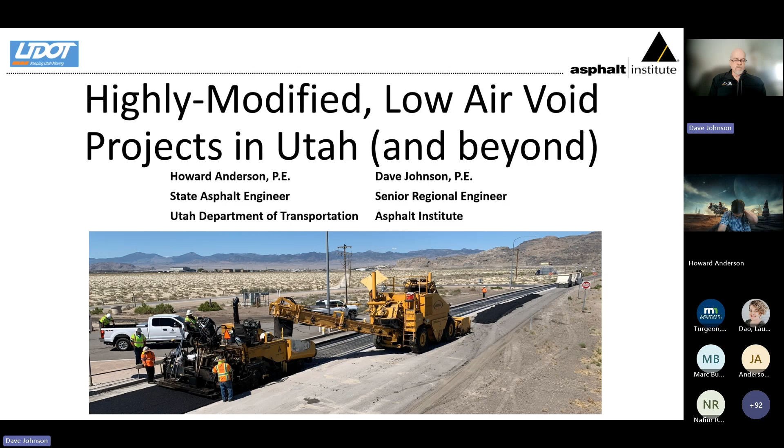So let's go ahead and get started. So what we're going to talk about is what has happened in the past as well as elsewhere around the country, a little bit of detail as it relates to thick lift paving as well as highly modified materials. We're going to offer some insight on the first pilot project that was done at the port of entry near Wendover, Utah, just off Interstate 80 along the Nevada-Utah border.

So I want to begin by acknowledging that this effort was really facilitated by an incredible partnership between the Utah Department of Transportation and the contracting community and the Utah Asphalt Pavement Association. Reed Ryan, who was the executive director for 12 years in Utah with their association, deserves a lot of credit as well, because of this partnership between the agency and the contracting community. The move to this material that some would have truly felt impossible has been quite seamless, and as we will see, the tonnage in the state of Utah is quite frankly exploding.

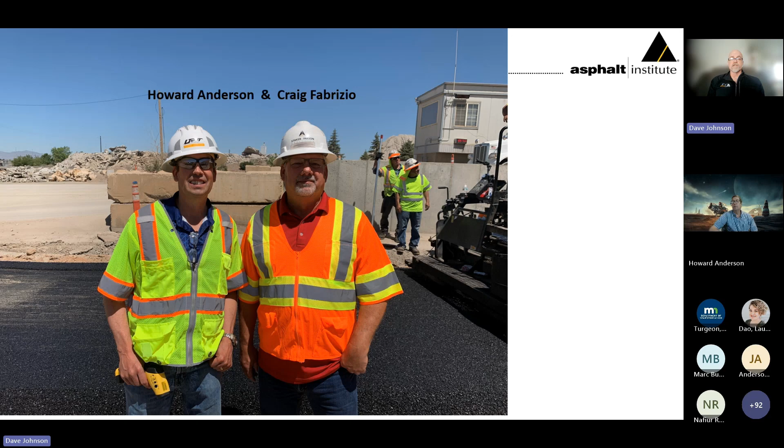So looking at some of the past experience with either highly modified or thick lifts, the state of South Carolina deserves special mention. They have been doing thicker lifts, especially along their eastern seaboard in areas where they're looking for rapid turnaround of a pavement. It may or may not be modified. It depends on the particular project, but they have had some pretty thick single lifts, almost to 8 inches, as we can see, 7.9 inches compacted. And they've consistently had very nice densities above 95%.

There's very few things that happen in the asphalt world that the National Center for Asphalt Technology at Auburn University does not get involved with. And they've had a lot of experience with thick lift paving to where that now is their go-to methodology when they're looking for a rapid rebuild of some of the sections. And that all began with some work that was sponsored by South Carolina and Kraton Polymers.

Kraton, of course, was looking at some highly modified materials. South Carolina had a combination of the two. The Kraton material in particular was laid in multiple lifts to a total of 5.75 inches, so 5 3/4 inches. It was a 12.5 millimeter mix. They also got fantastic densities.

And in fact, while it's not listed here, we say great performance. It was truly acting in a perpetual fashion. Unfortunately, that section was not re-sponsored by Kraton, and so it was removed after one cycle, 20 million ESALs. But very encouraging that we could have perpetual performance from a pavement, say that 3 times real fast, that was surprisingly thin, so less than 6 inches in thickness.

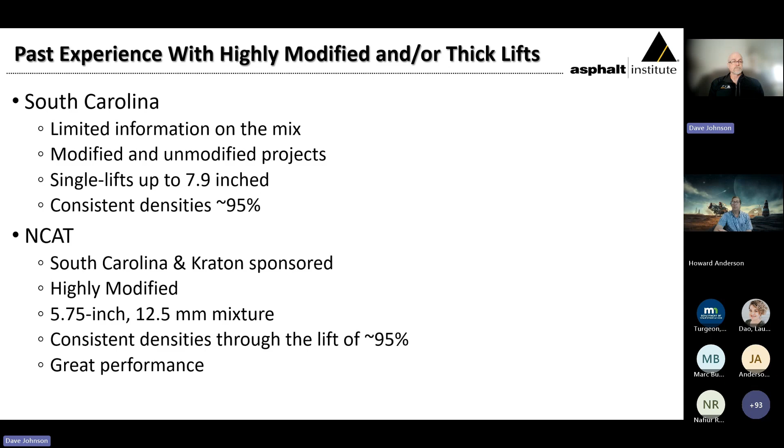Utah began work on this back in about 2015. They were doing a lot of work with the Hamburg device. Utah was one of the pioneering states of the introduction of that wheel tracking machine into the United States, and so they did a lot of Hamburg work. We've got some test results that we'll show you in just a moment.

These were a typical 12.5 millimeter super pave mix. They had binder samples from various asphalt contents all the way up to nearly 7%. They were running 40,000 passes, which is double the pass count, even for a higher pass count typically with the Hamburg. And as we'll see, they were making some modifications to the equipment for the second 20,000 passes.

They did a simple substitution on a couple of projects that were constructed in 2017. The simple substitution was taking a super pave mix design that had been designed with a 64-34 binder, and they simply dropped in a 76-34 binder and laid it at typical lift thicknesses of around 2 inches. The performance has been very acceptable, but Howard recognized that we could get more out of this mix if we were willing to look outside of our normal box of volumetrics.

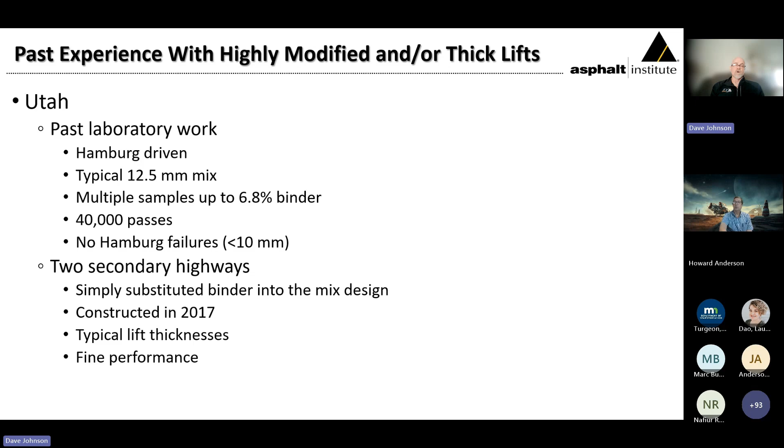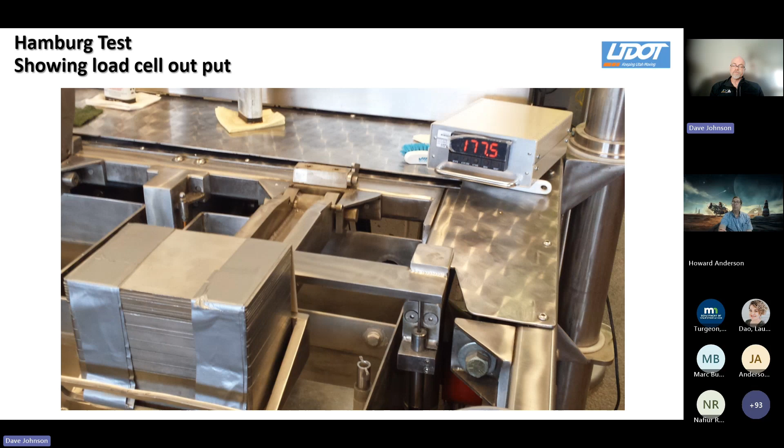I said that they made some changes to the Hamburg. You'll notice the duct tape extra weight. So they ran the Hamburg at its standard process for 20,000 cycles, and then they increased the weight for the second 20,000 cycles. You can see the results with, in blue, the original 20,000 passes, and then in orange, the additional 20,000 with the extra 20 pounds. 158 pounds is your normal loading, and the second set was with 178 pounds.

The other thing we want to point out is the air voids. So multiple asphalt contents are shown here at 1% increments starting at 4.8% up to the 6.8 peak. Notice that the air voids underneath the wheel went from a little above 7% at that lower asphalt content all the way down to the lowest value on the far right, about 2% underneath the wheel on the 6.8 low air void count.

The other thing to notice is 10 millimeters is the rut criteria for Utah on their typical Hamburg at 20,000 passes. Even after 40,000 passes, the worst performer was still meeting that requirement at just under 9 millimeters of rut.

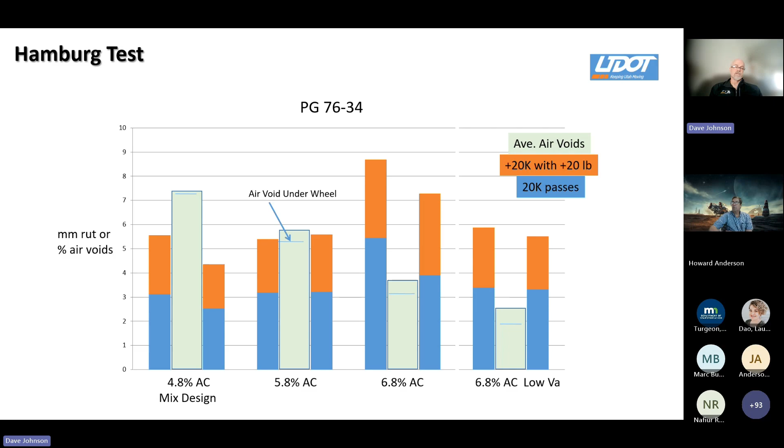Here's what those slabs looked like visually, so you can see. These were cut from directly under the wheel, and so there's not a lot of distortion that we see there.

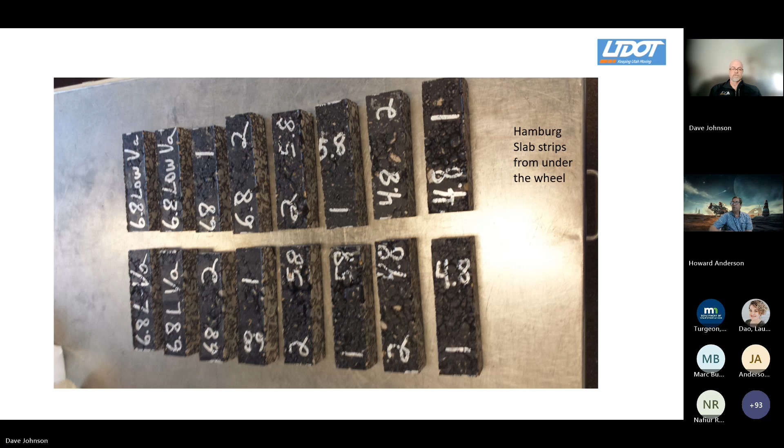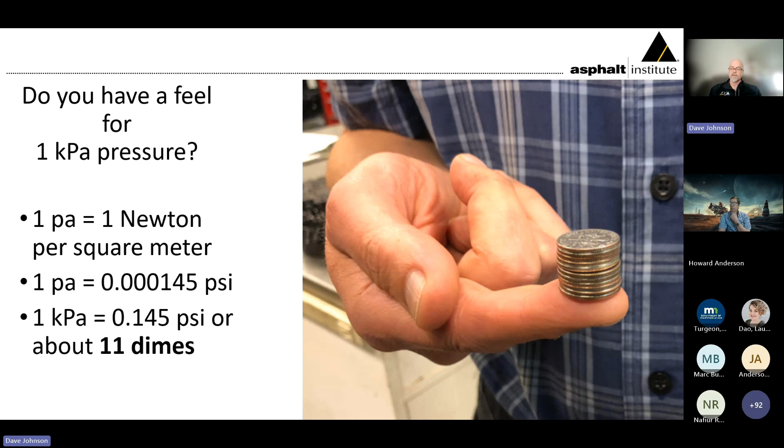To help put this in perspective, Howard and his crew have produced a couple of different videos. We're going to begin with one showing what happens in relationship to rutting. Howard does a great job of thinking outside the box, looking at common everyday experiences and how they might relate to a situation that we as pavement engineers converse in. He wanted to look at what 1 kilopascal of pressure would relate to in real world terms. In his spare time he did some math and found that it would be about the equivalent of 11 stacked dimes. So with those 11 stacked dimes, he placed them on top of a couple of different samples, and we have a video that they produced to demonstrate this.

So I'm going to let the video play and quit talking for a second.

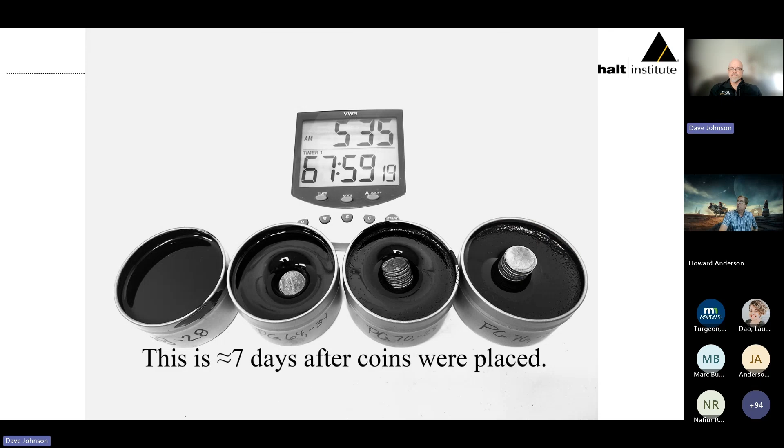Thought I had another picture. So there's 7 days, there's 14 days. And we have another video. They just recently, and quite frankly, I just added this video this morning.

They did some more lab goofiness. When you have an asphalt lab, you come up with some really neat ideas. I remember when I was at Montana State University in charge of our asphalt lab, we would play around with different things, and Howard and his crew have done so as well. They wanted to look at these materials, the same 4 binders as we just saw, under the elastic recovery device. Then they took it one step further, putting it at low temperature, just slightly below 0 on the Fahrenheit scale.

And then they dropped their specimens from a 3-foot level. I'd add, Dave, that these beams that are dropped have been through the rolling thin film oven and the PAV, just like a normal BBR beam. You'll also be able to see how they pour out, which is really a requirement for this to work, that they all are able to pour and mix at the higher temperature. But go ahead and play it.

So we have it playing, and we just poured the specimens, and here we are stretching it on the elastic recovery device. So the dog bones are getting pulled out, and then they were trimmed.

Offering some of the commentary because I don't think Howard can see the video again. I'm able to see it now. I had to press play.

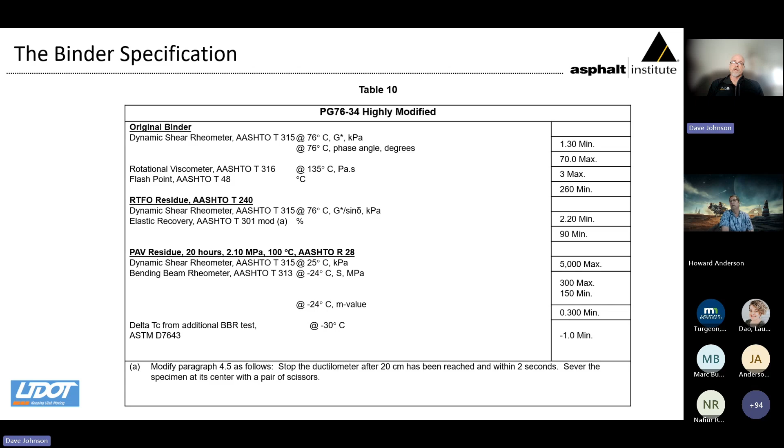One of the initial projects with the drop-in back in 2017 did experience some difficulties in the field of moving that material through the plant. So some changes were made and things have been working out quite well.

This moves us to the initial pilot project that occurred near Wendover, right along the Nevada border. This location is most famous worldwide for the Bonneville Salt Flats, where world record land speeds are attempted and commonly broken. It is an extremely high truck traffic area with between 2 and 2.5 million ESALs per year, with about 51% of the traffic stream being heavy commercial vehicles. It does get quite hot in the summer.

Just for your information, if we were to use the standard LTPP Bind software at 98% reliability, the binder that would be specified would be a 64-28. But we're using a 76-28, so we've got 2 bumps on the upper end and 1 bump on the lower end to get to that, the 76-34.

Did I say something different? You said 76-28. Thank you for that correction.

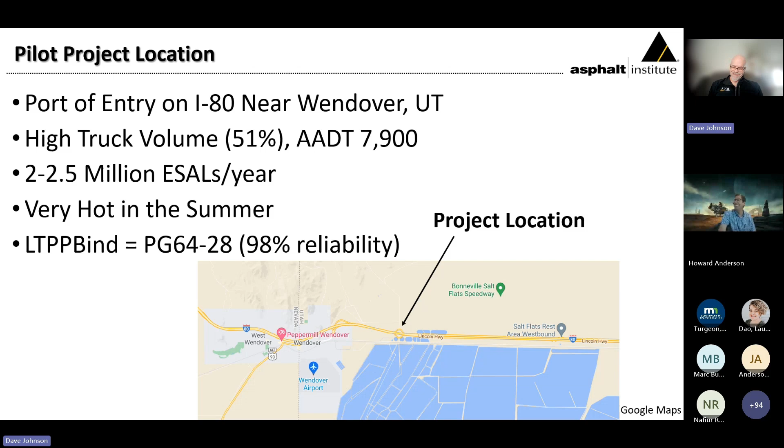The project itself was a 6-inch single lift. They milled and inlaid some existing Portland cement concrete, around 330 tons, highly modified binder of course. It was a dense graded 12.5 millimeter Superpave mix, and we'll show you that mix design here in a moment. It was constructed in a single lift, and it's also noteworthy that this is a 2-hour one-way haul.

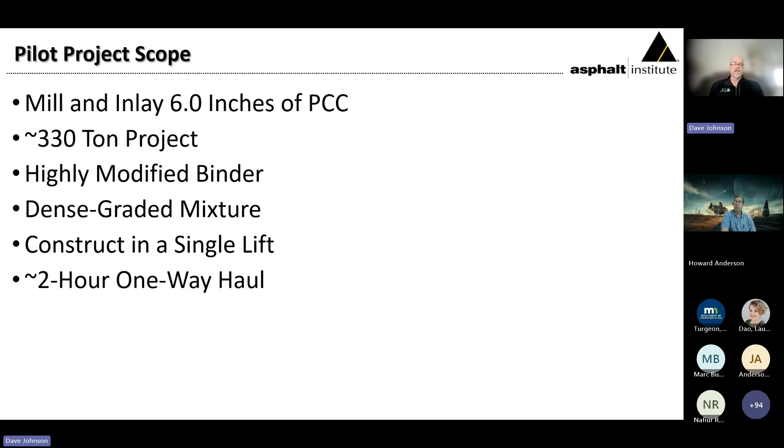So they were producing this material just north of Salt Lake City. The contractor was Staker Parsons, part of the CRH group, and they hauled it over to the Nevada border along Interstate 80, which takes them roughly 2 hours.

You can see the mix design requirements calling for that 76-34 binder. Normally, this would have been a 75 gyration mix design, but as we see, they dropped that down to 50. As mentioned, it is a 12.5 millimeter nominal maximum aggregate size. This is a hard rock quarry, 100% crushed material. The binder minimum requirement is 6%, which is exactly where this mix was designed to.

The air void range now is 0.75 to 1.25% air voids. 1% was what this was designed at. And just FYI, if it was taken out to 75 gyrations, it would essentially be a 0 air void mix.

The allowable range for VMA, as we can see, is 15 to 17. They were towards the lower end of that at 15.3. With those other volumetric changes, that requires a change in the VFA. The range, as we see there, is 90 to 95. This one came towards the middle of that at 93.3.

They did a drain down test with that higher asphalt content. They want to make sure that there wasn't going to be issues. Normally, you wouldn't do this in a Superpave mix, of course. We would use that for SMAs or an open graded friction course and that type of technology. But as we see, drain down wasn't an issue.

And then you can see the Hamburg results for this mix after 20,000 passes. And there was an adjustment made. We talked about in the initial work how they had added weight to the Hamburg. Now, instead of adding weight, they changed the temperature, bumping it up 4 degrees centigrade.

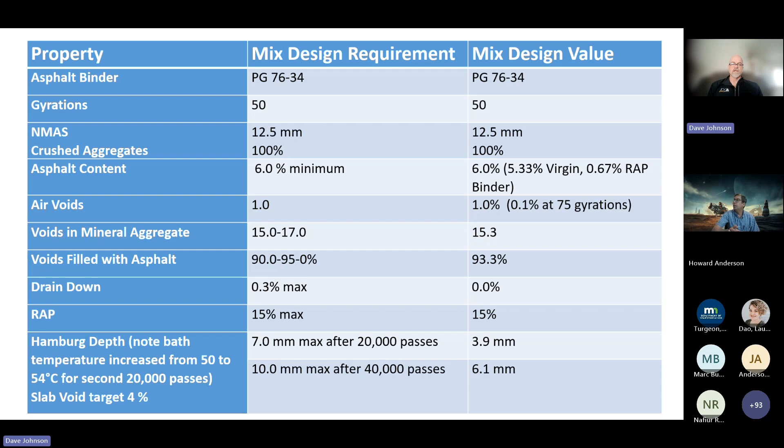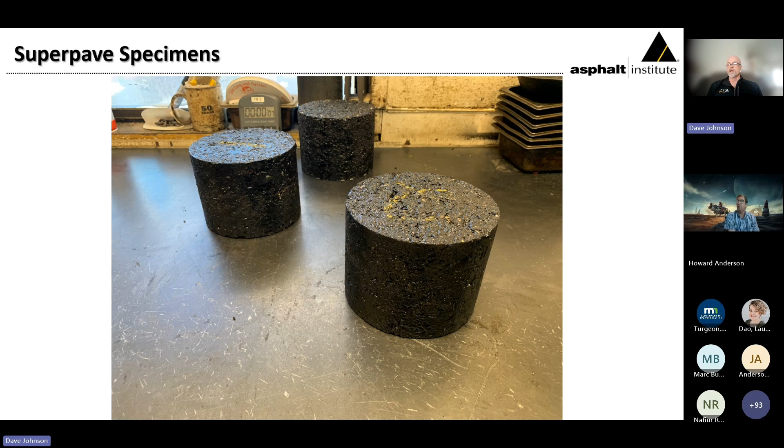Just FYI, these are what the specimens look like. This is a 6%, this is that initial project. Yeah, they appear a little bit rich, but there's nothing really terribly extraordinary about the pills.

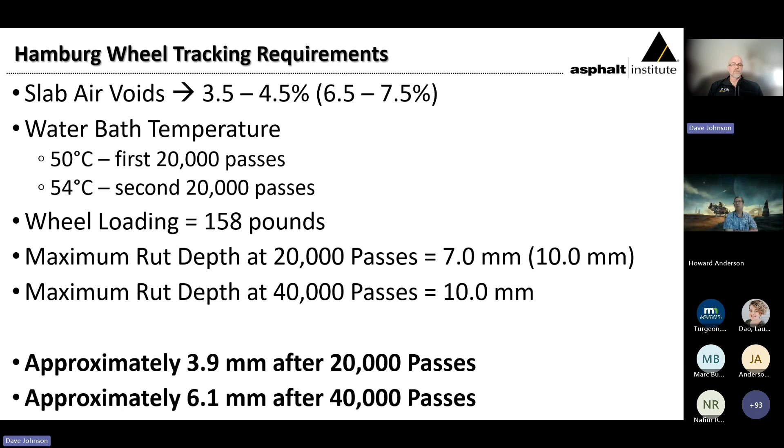A little bit more detail on the Hamburg. We already saw a number of these, and I mentioned how we made an adjustment to the air void content. There was that shift in the water bath temperature, the standard wheel loading at 158 pounds, and again a total of just over 6 millimeters after the full 40,000 passes.

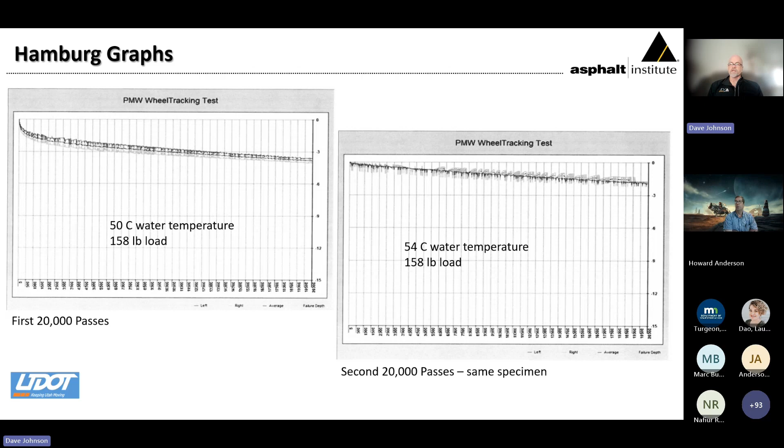Staker Parsons, as was mentioned, is the contractor for this initial project. They were producing this mix just north of Salt Lake City at their Beck Street facility, and they wanted to verify that they could actually work with this material and get the proper density. So they made the decision to produce mix and lay it. They were not compensated financially from the Utah Department of Transportation for this part.

Notable differences - as we mentioned, we're going to be paving essentially in a bathtub out at Wendover, surrounding the mix by Portland cement concrete in that milled area. Here, it's truly an unprepared aggregate base. That's their scale that we see in the background. A lot of trucks through the years have gone through there, so it is very, very well compacted, but their preparation was simply to run a blade across it, then broom it, then pave it.

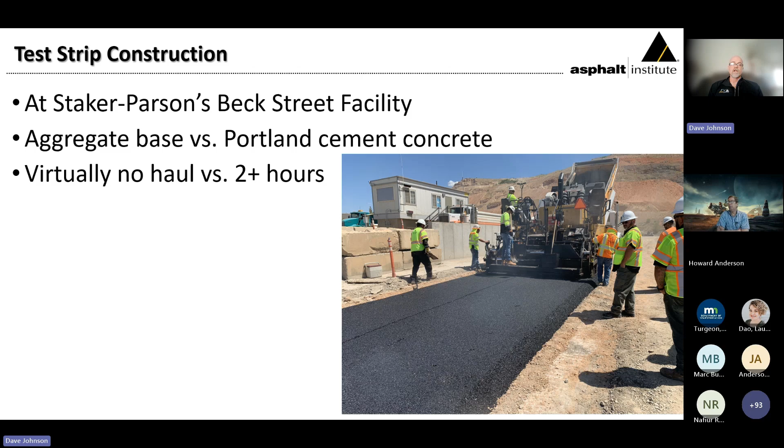There is no haul on this, so instead of that 2-hour haul, it's virtually a 0-minute haul. The test strip construction went without much of a hitch. Compaction was done with a single double drum vibratory roller, as we see in this picture.

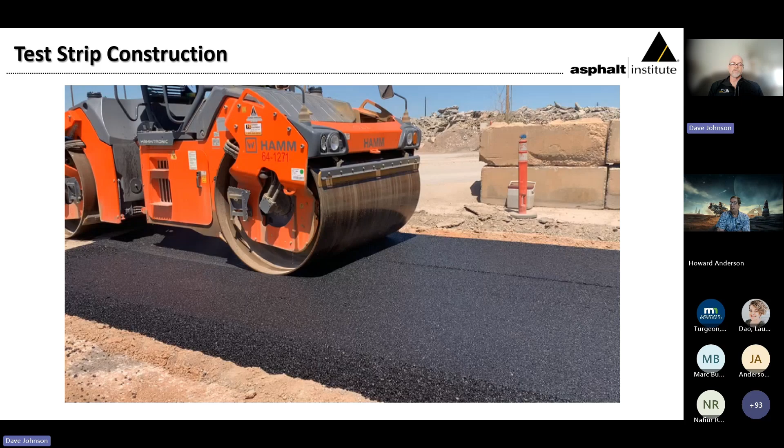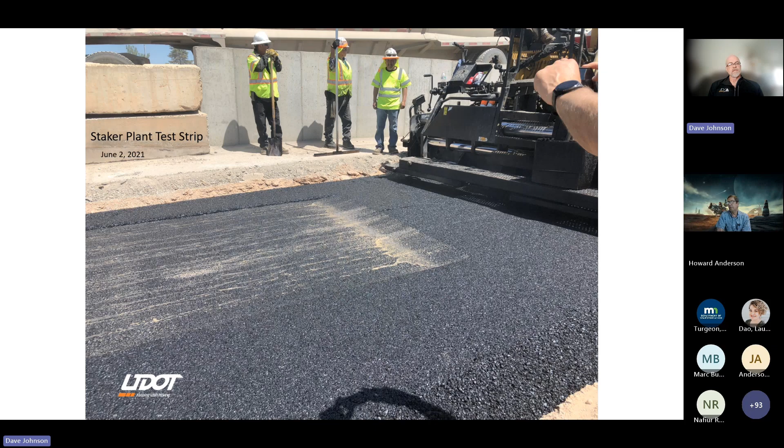Just an example of what it might have looked like after an initial pass. I have to say that my one regret is I don't have any pictures of the roller hanging off the edge of this mix. We all expected it to walk out a little bit. It was shockingly stable - not too much of a surprise when you're trying to pave at this thickness.

The volume of material that's running through a paver is pretty exceptional, and the contractor did have to make some adjustments to their process to make sure that they adequately fed the paver. Of the various things that they looked at in this test strip, this is one of the more valuable pieces of information.

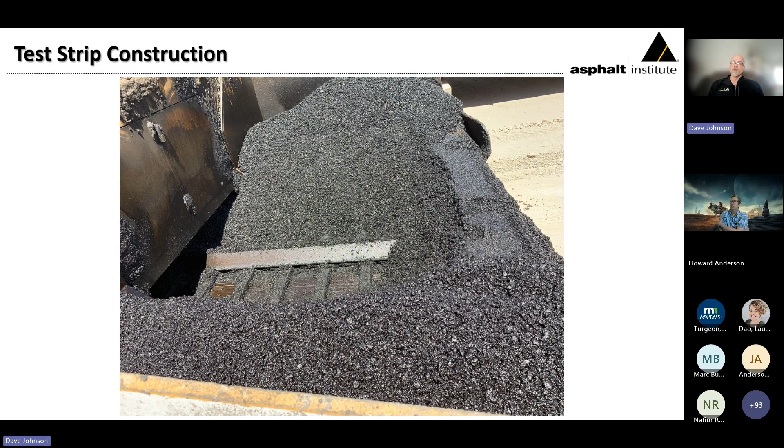Temperature is 275 at the surface and just at about 300 internally, so not exceptionally warm. What did we learn on the test strip?

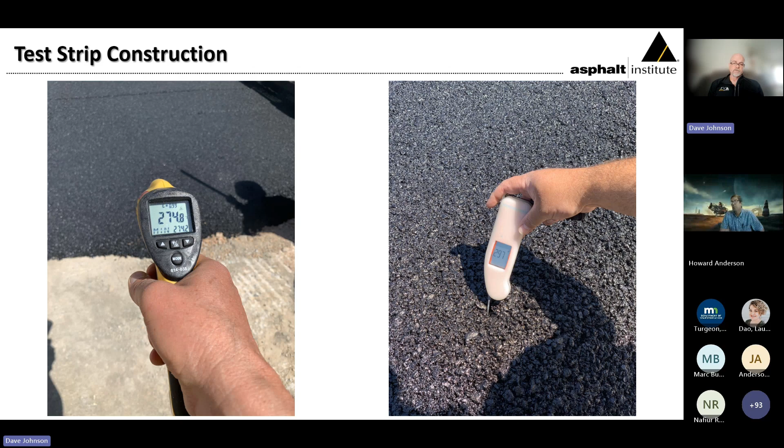Achieving densities of over 97% was rather easily done. Regular rolling equipment and procedures were followed. The roller operator for Staker Parsons, she and I chatted quite a bit, and she had anticipated trying to simply use her normal rolling pattern, and she was willing to make adjustments if that proved necessary. But her normal rolling pattern was functioning just fine.

Feeding and placing those large volumes was achieved, but as we saw in that picture, there were some challenges associated with that. The mix was exceedingly stable. There really were no significant issues encountered in the production of that test strip.

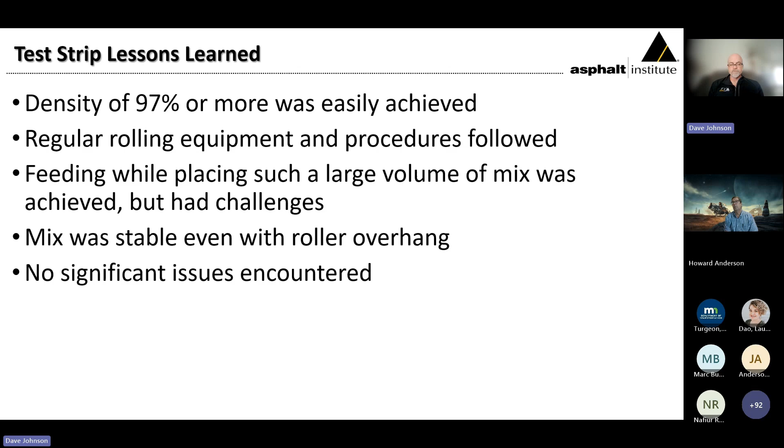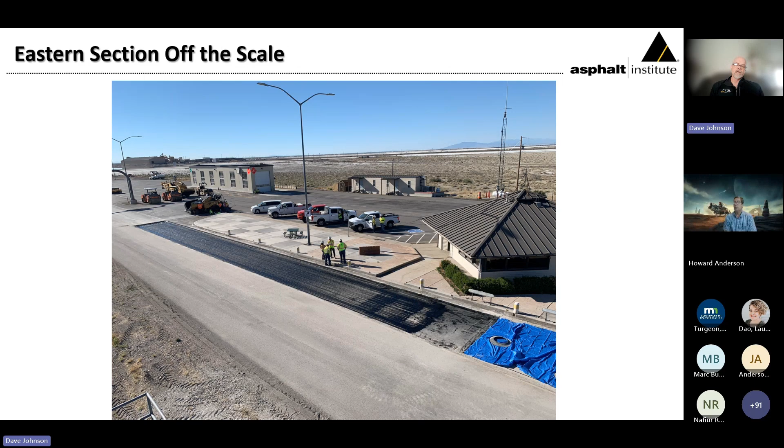So with the confidence gained there, they headed out to the Wendover facility the next day. This is looking back towards the state of Nevada, just off of the interstate, I-80. That was the forward end before the scale, and here we are after the scale.

I will point out, as anyone who knows me very well realizes, I'm a big proponent of good tack coat. I'm sure that Staker Parsons is doing a better job with those now than what they did in this particular one.

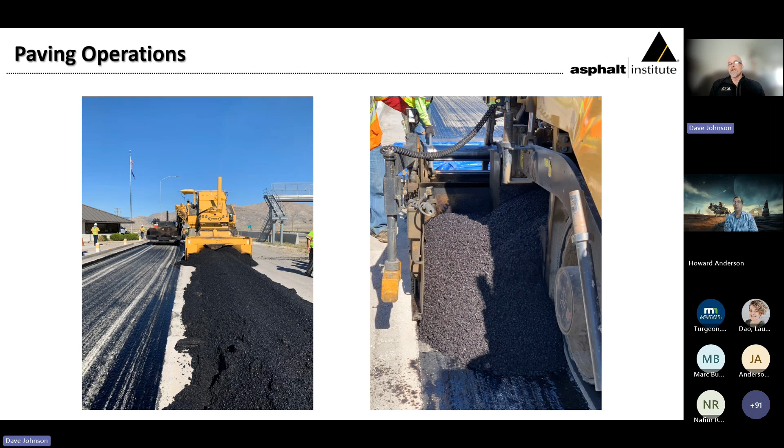But a very, very large windrow. Quite frankly, you wouldn't really be able to go any wider than this and put down more material than what they did on this effort. Feeding issues, again, had been overcome. Again, single roller — they have the redundancy there.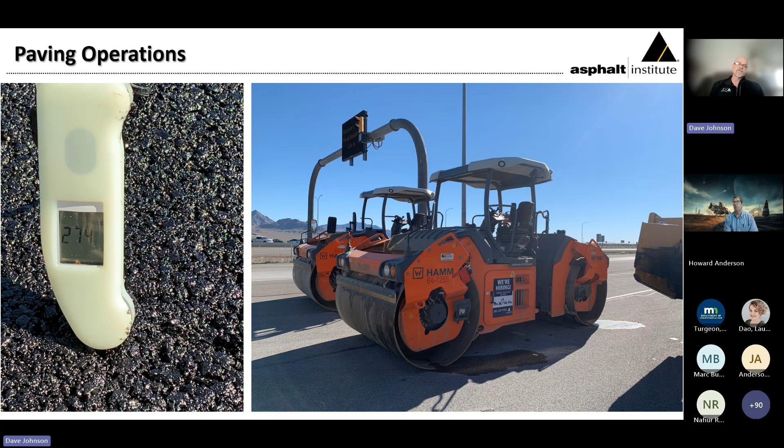The internal temperature with that 2-hour haul was about a 25-degree drop, so placement was right at about 275 degrees. There was a temperature probe placed at the bottom of this, which is still active. You can still plug into it and get temperatures if you'd like.

Notice the long duration it's taking this material to cool off. Thermodynamically, that truly is not a surprise — you have an incredible volume of material, and the cooling curves are very, very long because of that volume. Plus, this was done in July, hot temperatures — air temperatures were going above 90 degrees at this time, fairly long days. So it took quite a while for this material to cool off.

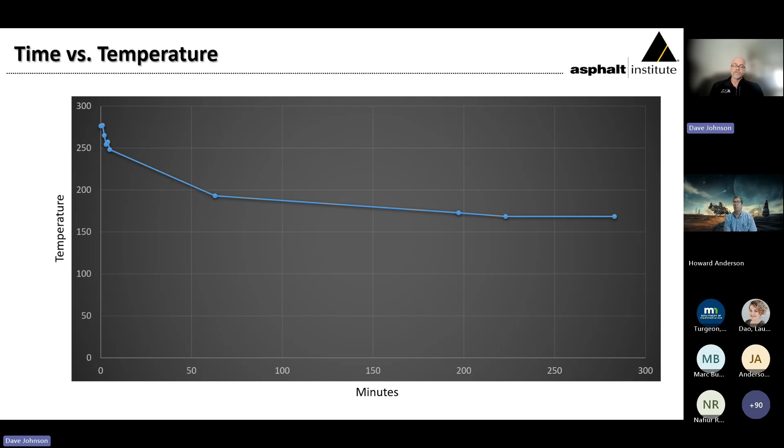On the positive side, because it takes that long, there is the potential to extend paving seasons, as well as widen the window of opportunity to get density. So what kind of densities did they get?

Utah is a percent-within-limits state, and they did apply PWL calculations to the cores, but only the top half of those cores. They popped a total of 4 cores, cut them in half, and measured density both top and bottom. The densities in the top half were very consistent — we see the ranges between 97.2 up to 97.9. In the bottom half, we generally had some very good densities as well.

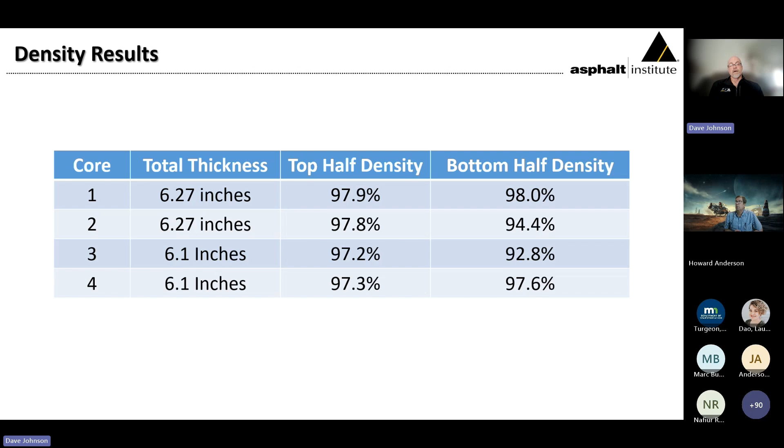But notice on core 2, and in particular core 3, that there was a bit of a drop off. What happened there is there was an issue with delivery — a truck broke down, which meant mix was sitting in one of the shuttle buggies, causing issues getting that material out. They had a second shuttle buggy on site, but the upshot was an extensive delay in the process because of that one hiccup on that one truck. The result was that in the bottom half, the density was still pretty respectable at almost 93%, but 92.8 was a notable low spot.

So how has it gone? What we learned is that highly modified asphalt can be successfully constructed even with a 2-hour haul. This has been something that has come into play with projects since 2021 when this was built, where they do have some longer hauls with some of this material. High densities, as we saw, were easily achieved.

So far, this particular location has seen over 5 million commercial trucks, and quite frankly, there's nothing wrong with it. There's no discernible movement, absolutely no cracking, and zero distresses that could be of note. The question I get asked is, is there any rutting? And I say, oh, absolutely, there's rutting — it might be 2 millimeters. It's very, very minimal.

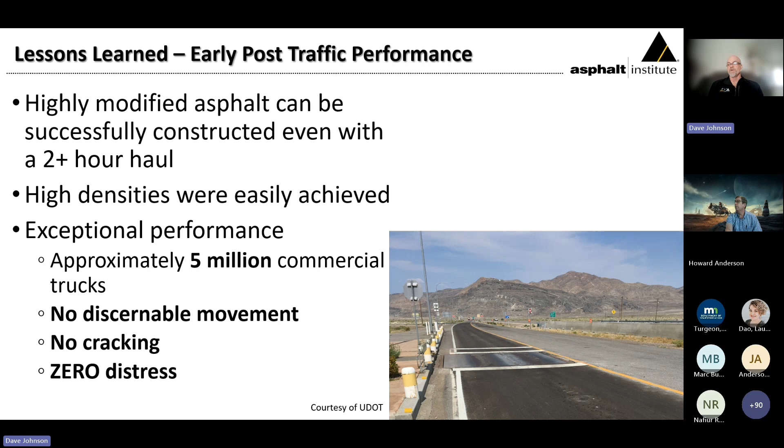So this is what the test section looked like 5 months afterward. And then I was out there in October of '23, and again, the section looks fantastic. All that cracking you see in the foreground, that is not this material — the material is only on the scale area.

The thing I want to point out, especially in this picture on the right, is notice that extremely long queue of trucks. Quite frankly, the trucks were queued all the way back to Interstate 80. They could not put any more trucks in this queue than what we see there, and this is not abnormal conditions for this site. So recognize that you have a significant number of trucks — they are going to be at a standstill for much of their time on this material, and when they're not standing still, they're moving at very slow speeds.

Absolute recipe for rutting, especially in these hot conditions. And despite all that, the mix is standing up extremely well, and no rutting of any magnitude has been experienced.

Let me add a comment. If you go back to that slide, Lonnie tried SMA at this place, and it lasted 6 months before it shoved and had to be removed. So for this to work under these loading conditions, Lonnie's comment was, if it works here, it will work anywhere. Also, there's been no movement of the binder within the mix, and absolutely no flushing. The 2 millimeters, or eighth of an inch, of rutting you mentioned is just wear from all those trucks going over the surface.

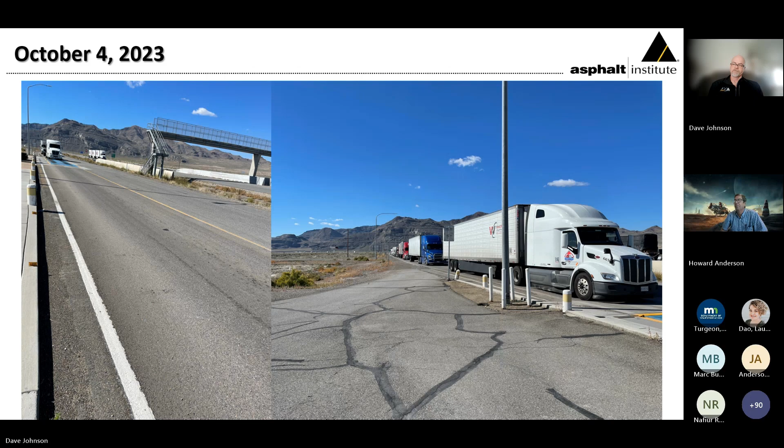Questions come up about safety, of course, and skid numbers at a truck weigh station - that's less of an issue than a more normal operation. But they did do some British pendulum testing of the existing material and the new pavement, and the values of that new pavement were very acceptable. Those values typically go up a little over time as we remove some of the binder from the rock, and then they tend to stabilize. So a 53 on that new pavement is very, very good.

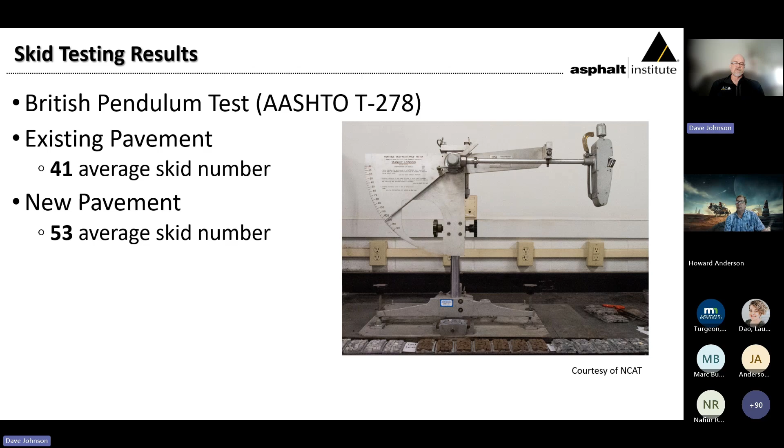Cost considerations - that first project cost $150 a ton, and I've got a little table showing what has happened with this material in terms of cost through time. The expectation was that it would end up similar to an SMA, perhaps slightly less, and we'll see how that worked out.

We expected the binder content to be less than what was required for an SMA, but because of that high polymer content, we thought it would be a bit more expensive. We didn't anticipate needing anything like mineral fillers or fibers. We figured testing would be slightly less for both QC and QA than for SMAs. We thought we could produce this at higher volume, and expected that over time the cost of the polymer would become more competitive as it became more of an everyday mix in the state of Utah.

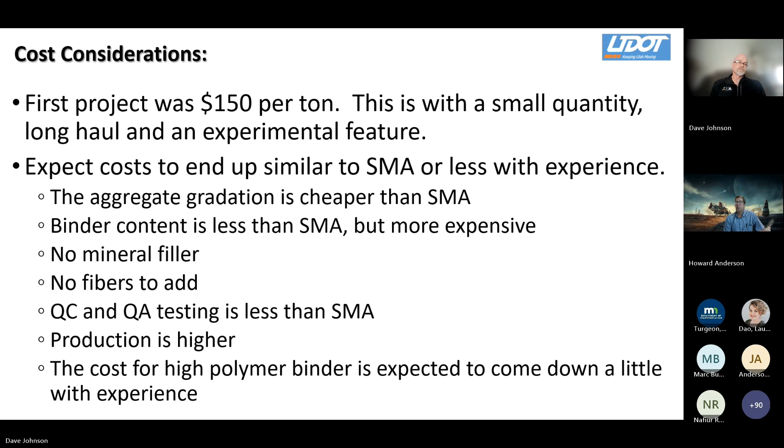The contractors also really appreciate the one lift paving. They have a large window for compaction, giving them the opportunity to get good densities without working excessively hard. We have less cost for traffic control, because the turnaround of a project can be that much quicker, so user costs get reduced. It's also noteworthy that with single lift paving, there's no opportunity for debonding between layers, since there are no layers other than that single lift, so we don't need a tack coat between layers. This helps produce a stronger, more durable pavement, and work done at both TTI and NCAT helps support that statement.

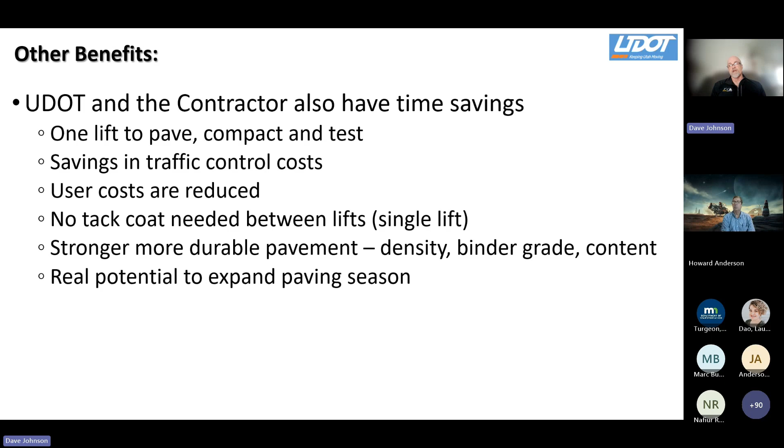We also see a potential for expanding the paving season - maybe not quite like we have today in Montana at 0 degrees Fahrenheit, but early and late season paving windows can be expanded because of thick lift paving and the extended cooling rates under those designs. For maintenance of traffic, it does take longer for this to cool off, and especially with heavy truck traffic, that should be considered when you choose to reopen this material.

The question on IRI - you're alluding to a potential negative with thick lift paving. Smoothness - with one less opportunity to improve ride, there's generally a greater challenge in getting that smoothness, especially with thick lift paving. Any little mistake the paving operation makes is going to be magnified with that thick lift. So regarding the IRI at the Wendover facility, quite frankly it's a little bit high, but because of the speeds, it's not an issue.

There's plenty of information about these more mainline projects, and what Utah has done is lay this material down, profile it, and then do smoothness grinding - bump grinding, if you will - to get to the required smoothness. We'll also see in a moment that with this high density material, its grinding operations go very, very well, quite similar to what you might see on a concrete pavement, actually.

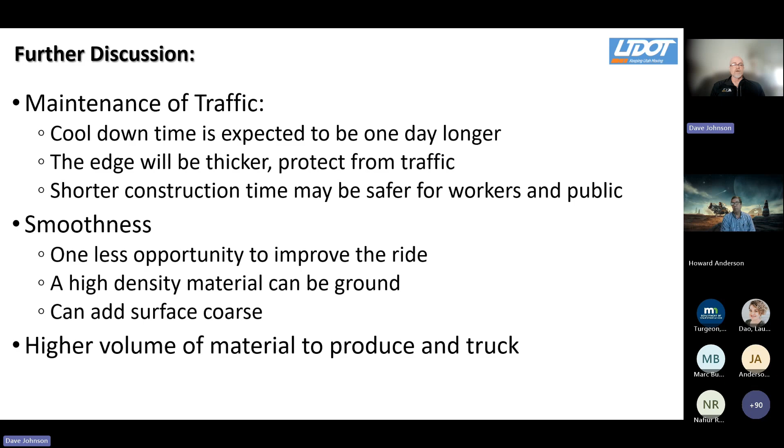There was a desire to see how this material would perform in some other severe conditions, and there was an opportunity on Interstate 15, fairly close to the production facility. If you're familiar with Salt Lake City, north of there near the amusement park at Lagoon, that's roughly where this material went down in the northbound lanes of Interstate 15.

It was a concrete pavement that had, quite frankly, performed as we would hope. It had given adequate service to the Utah DOT, but it was time to consider a change to that material. It had reached the end of its life.

The plan had been to crack and seat this material. The decision was made to instead place some of this highly modified low air void material on it in a single 3-inch lift, and see how its performance would be. That's indeed what was done.

It was the same contractor with the same mix design, and so the same unit cost, and they laid that down in 2022, I believe, and that material has held up very well.

It got very good densities once more, at about 97%. The binder content was really close to the design of 6%, and the VMA was a bit higher than the mix design—if you recall, that was 15.3 versus 15.7. Performance has been extremely good.

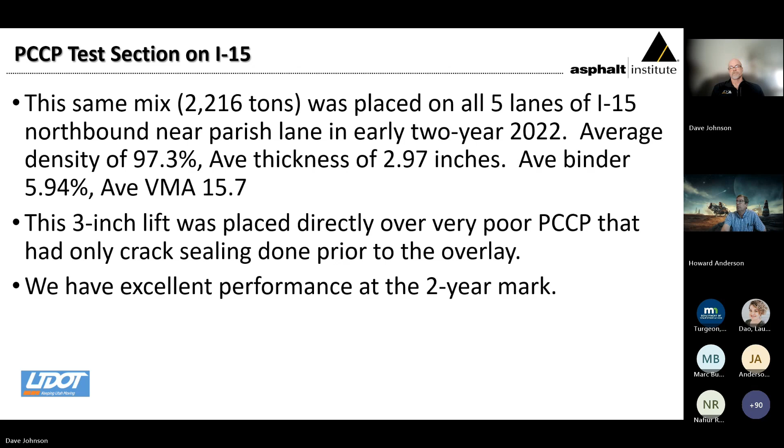Here's some shots of that material at the beginning of that project, moving through it, and one more for good measure. Very good performance. This is about a year after it was installed.

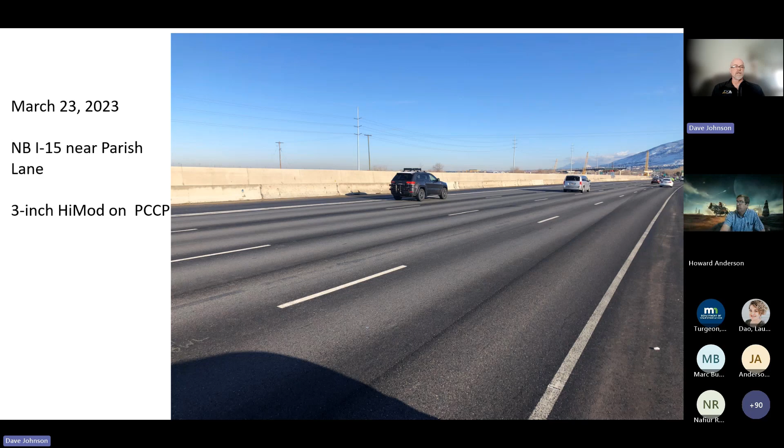There's been a number of other projects between '21 and '23, all listed here. Thicknesses ranged from a low of 1.5 inches—some of those 1.5 inch overlays are on bridge decks—up to a thickness of 6 inches at the peak, with densities anywhere from a bit over 96 to a bit over 97% on these projects.

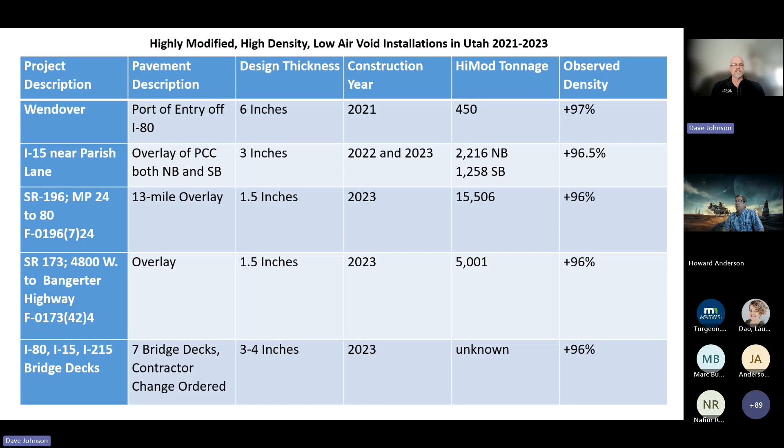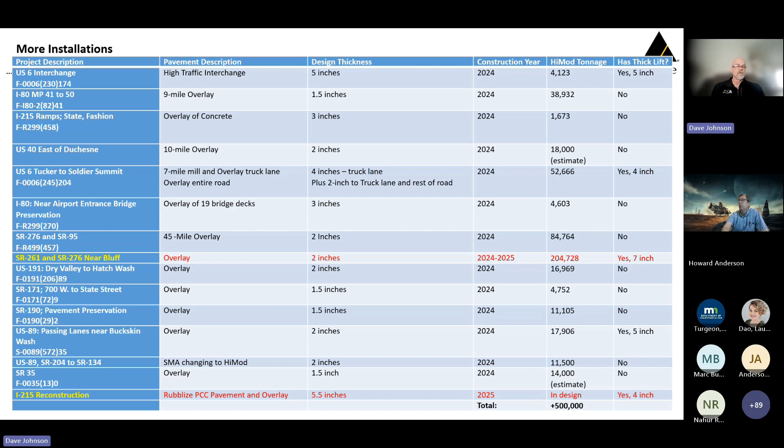I apologize for the size of this, but these are more installations happening in '25, as well as some that happened last year. We'll talk a little more detail about a couple of those—the two red ones.

Just to show you how acceptance and growth of this material has occurred in the state of Utah: that first project was that 330 tons placed at the Wendover facility at $150 a ton. In 2022, there was an increase of tonnage, about a 9-fold increase to 3,000 tons, again at that same unit cost. Then in 2023, there was another 8-fold increase, a bit over 24,000 tons, in some different applications.

We saw that the cost per ton went down as the industry became more comfortable with this—the price went down as the volume of material increased. One asphalt producer in particular was very aggressive in their pricing to attempt to be successful on those projects with their contractor colleagues. Then last year, things really started to explode.

Howard was just telling me before this webinar began that 525,000 tons were actually not achieved last year—some of those projects are carrying over until this year—but there was still a notable increase, almost 400,000 tons. Howard confirmed that was around 350,000 tons completed in '24.

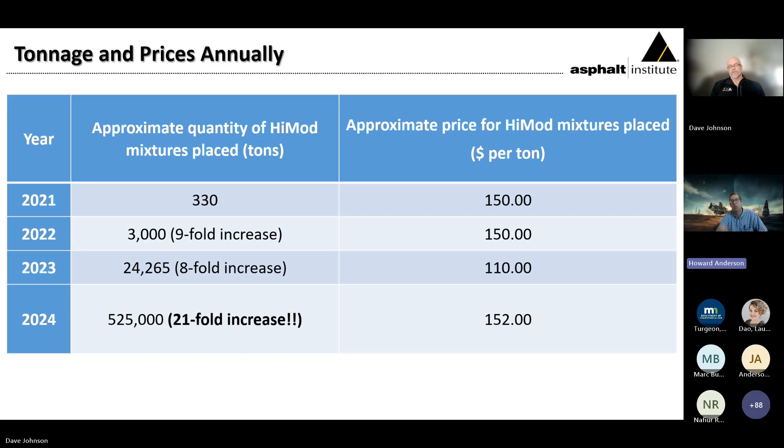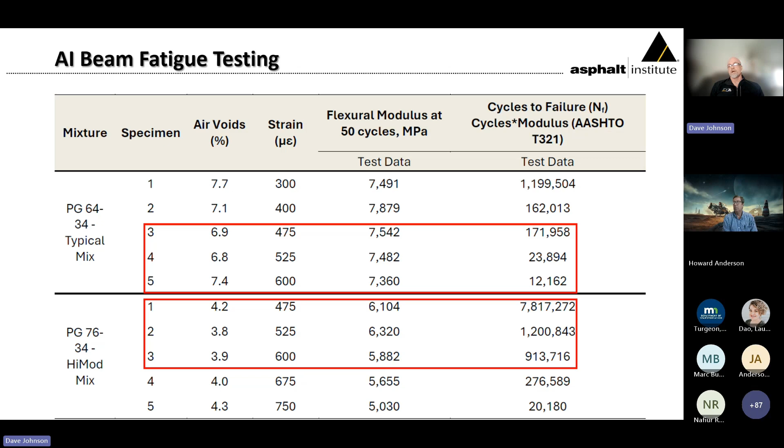And this 76-34 binder, low air void mixes are blowing it away. We have some additional independent testing. The mobile testing lab for Federal Highways was in Wyoming doing a project, and so we delivered some of the 64-34 Superpave binder as well as highly modified binder. This material is currently getting tested under the Texas overlay test. I haven't seen any of those results yet, but we should see them soon.

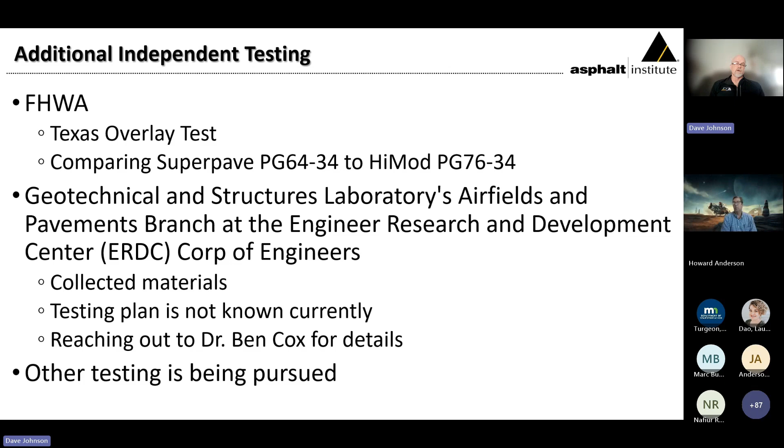ERDC and the Corps of Engineers out of Vicksburg collected material last summer, and they are planning on testing it. We don't have information yet on what exactly they plan on doing with this material, but I'm reaching out to Dr. Ben Cox to get those details. And then we have others wanting material to test. For example, Tom Bennert at Rutgers University has asked for material, and we are hoping to get him some. Dr. Emad Kassem out of the University of Idaho is also interested in getting some material. So I offer that to say, stay tuned. We expect to get more independent testing with some unknown testing regimes at this point, but we are looking forward to being able to report on those when they become available.

So what lessons have we learned as a state and as an industry? With this material, getting densities above 96% is very easily achieved, which helps facilitate a rut-free pavement. Regular rolling equipment and procedures have been followed very successfully. Feeding and placing large volumes of mix was achieved. It does require diligent planning on the part of the contractor, but when they properly plan for that, having enough trucks and cycling properly, they've been able to maintain a good, smooth, steady flow of material. The mix is very stable and workable. Thin lifts as thin as 1.5 inches have been placed successfully as well, and it's working quite well on bridge decks, as was already mentioned.

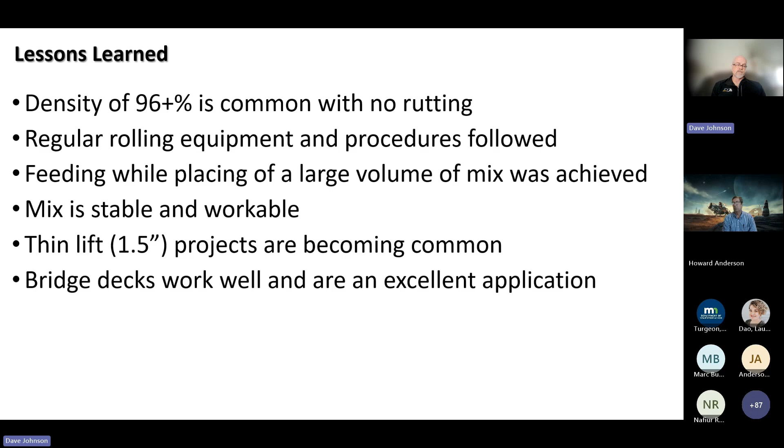Howard talked about the flushing issue. The details of this slide are more than necessary, but the bottom line is he did some calculations to verify that even at those low air void volumes, there would be enough room for expansion of this material in the heat of the summer, so we would not experience flushing. The upshot is that there was adequate room, and we indeed have not seen flushing in the field.

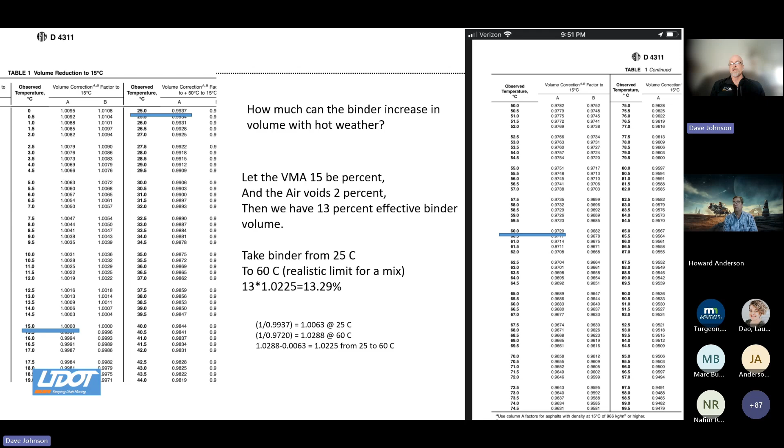Some notable facts: we have seen a huge increase in tonnage, about a 20-fold increase was planned in '24. As we already mentioned, some of that is carrying over to '25. That is looking at what happened in years '21, '22, and '23 compared to '24. Average bid prices are typically falling between Superpave and SMA. And as Howard mentioned, the contractors are very encouraged and supportive of this mixture. They are offering value engineering proposals to the state of Utah, which are commonly accepted, switching SMA projects to this material.

It's also worth noting - go ahead, Howard. Dave, I was going to add that they're giving us money back even when they're change ordering, so $7 to $8 a ton, I believe, is the number I've heard.

And even at that point, they're very happy to do it. Last year we did more high mod mix than any other single mix, more than we did regular HMA or SMA. It's definitely become the go-to mix, and in 2025, 90% of the tonnage in Region 2, the Salt Lake City area over to Wendover, is going to be this highly modified low air void mix.

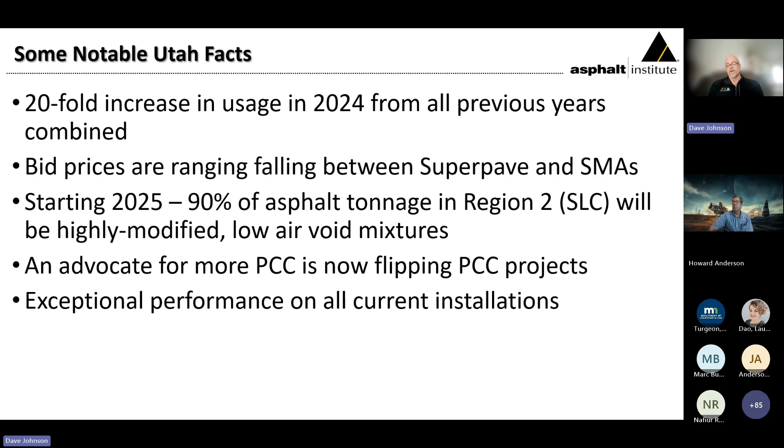Is it a perfect mix? No. Will we have a problem at some point? I think the answer is yes. But as long as we are doing our due diligence and getting a good mix design with good construction technique, it's going to be hard pressed to actually have a notable issue.

So here's some details on that Interstate 215 reconstruction. This was originally designed to be a removal and replacement of the Portland cement material that was there. Because of the excellent performance, the question was asked, should we look at another option? They wisely pursued an evaluation of rubblizing the existing material and then overlaying a total of 5.5 inches of the highly modified low air void mix.

They're going to rubblize it this year and do an initial leveling course of 1.5 inches and then a final lift of 4 inches. That's going to equate to a $40 million savings compared to the original remove and replace option. What are they doing with that money? They're extending the project 17 miles for additional ramp reconstruction - doing all the work necessary within the boundaries of the original project, then stewarding that extra $40 million for 17 more miles of ramp work. So a tremendous cost savings on the project, and good utilization of that money further down the corridor.

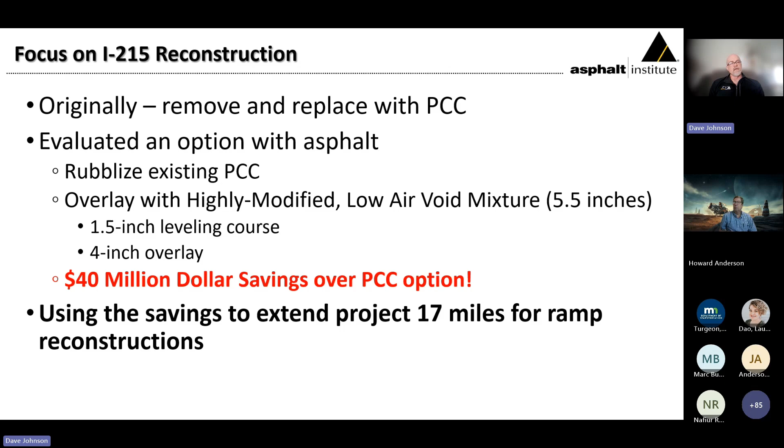We do have some future projects - I didn't think I had Colorado, but there it is. Montana, and I know we have some of our Montana engineers on who are partners with NRRA, released a bid last fall for 19th Street in Bozeman. Much of what they're doing specification-wise is emulating what is going on in Utah. Montana is an MSCR state, and still, instead of the 76-34 binder, it's a 64E-34 under the MSCR system.

I do know that suppliers for both states, Idaho Asphalt in particular, which was the supplier for that first project, are actually utilizing that exact same formulation for the 76-34 and sent that to Montana to compete for the 64E. Instead of a 12.5 millimeter mix, it's a 3/8 inch mix, a 9.5 millimeter mix. The project was awarded and it was about 75% less than the engineer's estimate, and that will get constructed this year.

The Idaho Department of Transportation has also been watching this mix, and they have identified a project. It's going to be a 12.5 millimeter mix emulating the Utah spec. They might be raising the air void slightly - talking about doing 2 or perhaps 2.5% air void instead of 1%. They're also looking at a 2025 target for their construction.

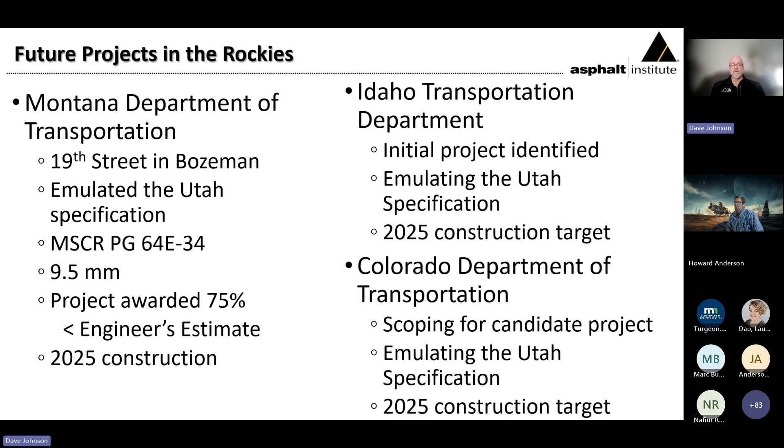So with that, I want to thank the Asphalt Institute members, all 129 of them. It is their support that allows me to be a part of this. It's their support that allows me to help get the good word out on the fantastic work that Howard and the Utah DOT are doing with that.